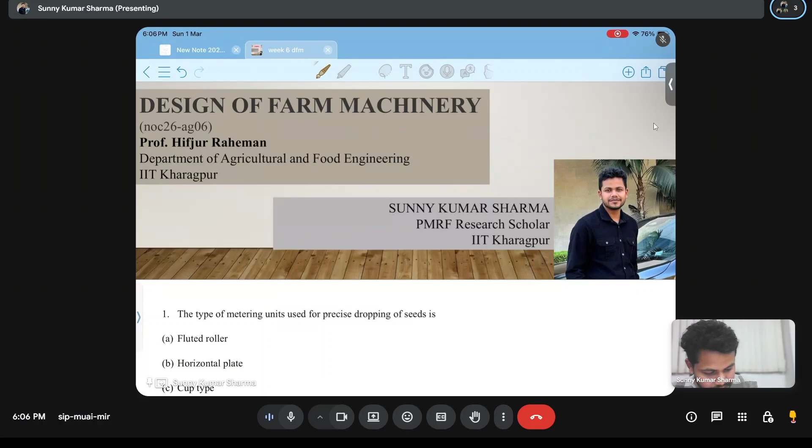So Jigyasa, have you solved all the assignments? Till where have you solved? Sir, actually I didn't know it would be preponed, so I prepared myself for Monday. So I have a lot of doubts from the first week itself. Can I ask now, or after solving this? Yes, you can ask.

Sir, from lecture 5, there was a question on disc plow, not from the assignment question, rather from the lecture video. Week 1? Lecture 5.

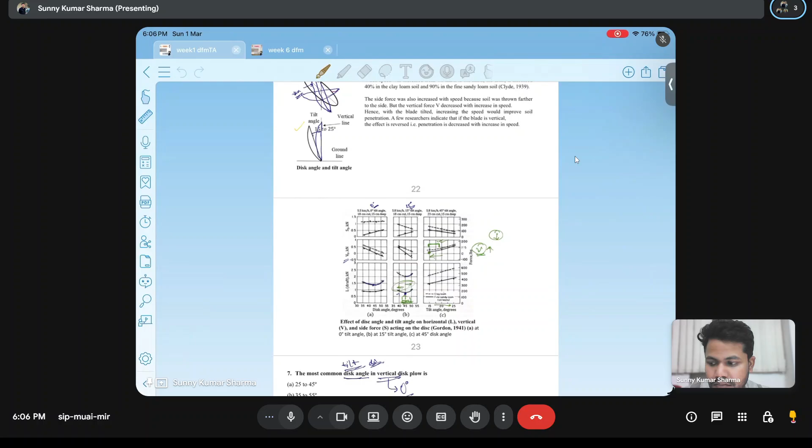There is a question, there is a numerical, sir, solved. Can you please explain that numerical itself, because I couldn't understand the first part. And from the assignment questions, I have doubt from question 5, 7, 9, and 10.

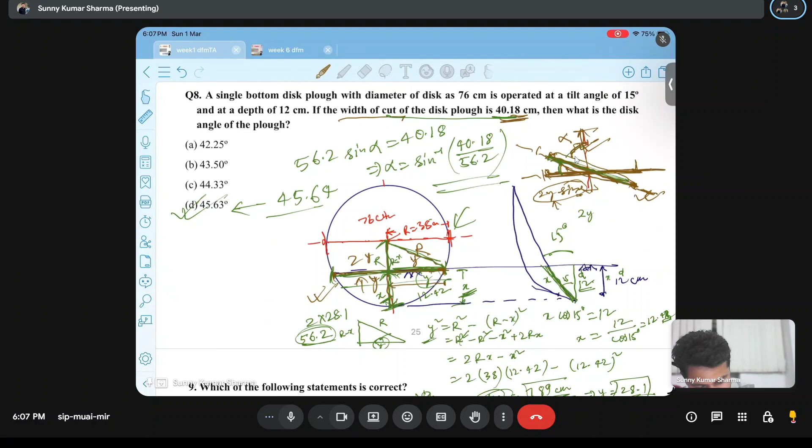Question 5, this one, right? Yes, question 5, then 9, then 7. I am not sure about the options there. I think, sir, this was not in the assignment we got. Those are not the options in question 7. Question 9, question 5 is in the 9, right?

We had, sir, 15 to 55-degree probably. So I'll check the most common disk angle in vertical disk, common disk angle 40 to 45. That is not the answer. So what you are saying is C is the correct answer, no?

No, no, actually sir, the options we have in our assignment are different from this. I was saying that we had different options, and the correct option that was given, that one also I had doubts about. I'll check it.

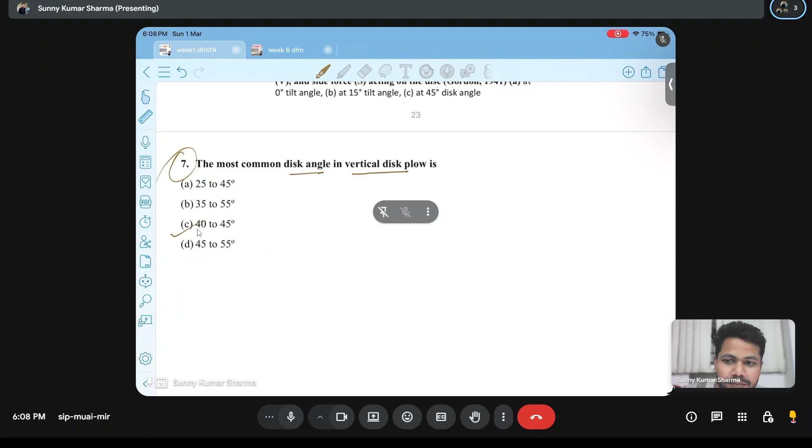Am I pronouncing your name correctly? Chisna, sir, it's Jigyasha. Sorry, Jigyasa, just curiosity.

Okay Jigyasa, actually what you are solving now is this year's assignment, and what we are solving here is last year's assignment. But sir, I had doubt in our assignment, this year's current assignment, given in question number 7.

Here they have asked the most common tilt angle in standard disc plow. And what is the answer? The answer given here is 15 to 55-degree.

15 to 25, and what did you write? No, no, it's 15 to 55. Okay. So I also did 15-degree, but it should be 15 to 25, no sir? This will be 15 to 25, yes.

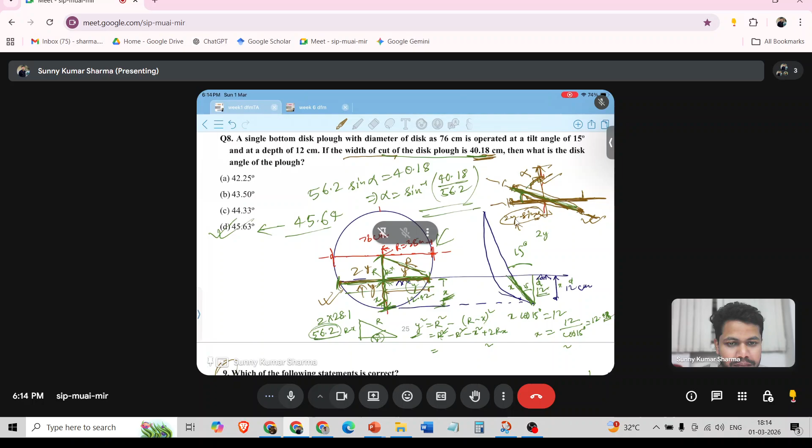And in your assignment, it is written 15 to 55. Sir, yes, that is wrong. Wait, let me check. Actually that's right, I have jotted down all the doubts. Okay, thank you for pointing this out.

You can sum up all your doubts, like this transcript problem you are telling now. Just remind me, I will go to NPTEL. That is a serious issue. If you are missing too much on standardization of the notes, that will be problematic for the coming students as well. Yes, yes.

And what is that exact question of that week one you are telling? Well, that is question number 5. From which week are you telling? Week one. No, no, questions are from lecture one, lecture number 5.

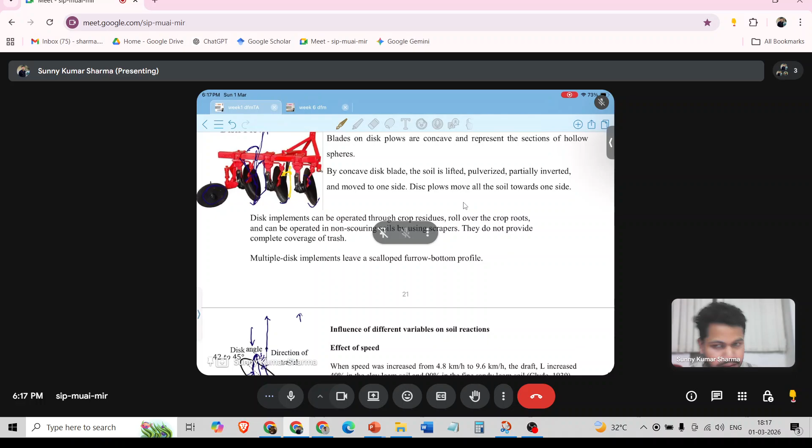Okay, lecture number 5, question 1, like towards 15 minutes. The PDF of the assignment itself, after the date of assignment submission is over, they upload the PDF of the assignment along with the answers. So if with this course it can be provided, that will be helpful to form a note kind of thing, to print out detailed solutions. In other lectures you are being given detailed solutions, and here you are not being given that.

Sorry sir, I couldn't follow. It means in other NPTEL courses you are being given those detailed solutions, solutions also? Is that so? No, it depends, course to course it varies. But after the feedback form and after assignment, there is a section in which they are providing the PDF, may it be a detailed solution or simply a compilation of all the correct options and questions, whatever the course instructor wants. But there is some provision of a PDF. Okay.

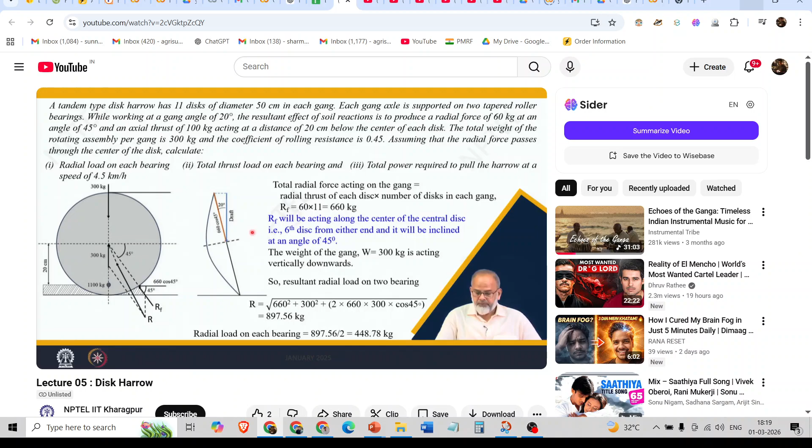Radial load on each bearing, total thrust load on each bearing. Okay miss, I need to read this question, this I have not solved here, by discussing session.

So in next class I will solve this question. Whatever I have taught in question five, right now I will solve this question. Lecture five, I'll ask you in the next class. I will solve that question. Okay sir, I need to read that question, and here we are solving.

Week six, I have noted it down sir, and two more questions from assignment one itself. Okay so sir, question number one. Question one only, assignment one. No, no, not question one sir.

I have to search from here. This is the problem, actually I have to go to the... no I don't have the PDF, so I have to search from here. Sir, the uh...

Question number 9 and 10. They have this: which of the following statements is correct? Nine and ten, they have said like two statements have been given, neither may be correct.

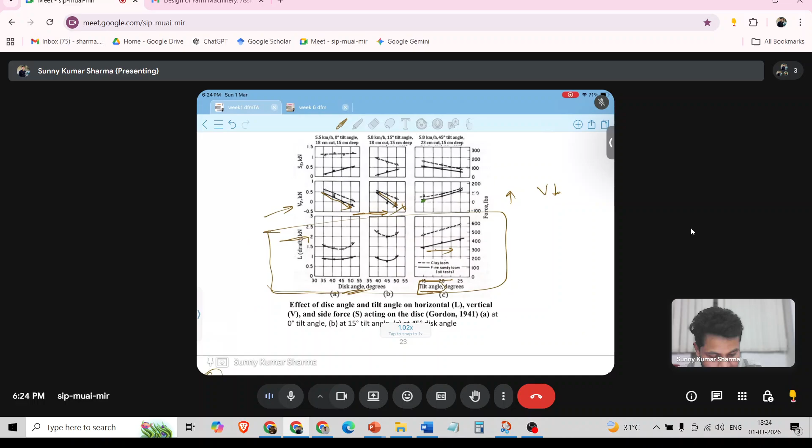Answer question number 10, question ten. What is question ten? It's on disc harrow. The resultant downward force acting on the gang of a disc harrow must act at some distance. Suppose this is the disc harrow.

Here some thrust is acting, this weight - the resultant downward force acting on the gang of a disc harrow must act at some distance from the center to obtain uniform penetration. So this weight will not act at the center, it should act at some distance so that this thrust force, whatever is acting on the disc harrow, will balance the weight moment. So that statement is correct.

Yeah correct, the weight should act at some distance so that this thrust is not acting at the center. If the thrust had acted at the center, then weight would act at the center. If the thrust is acting below, like soil is being disturbed at this portion, so thrust is acting somewhere else, to balance that moment weight acts at some distance. So the first statement in this case is correct.

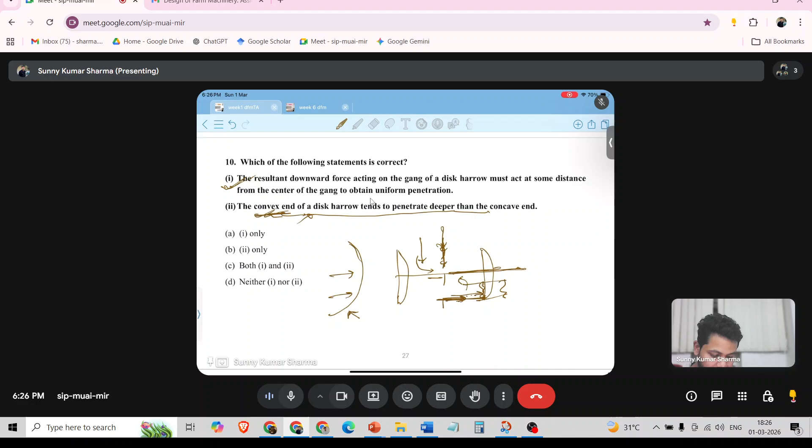The second statement is: the convex end of a disc tends to penetrate deeper. That will become incorrect, because the concave end - this is the concave end and this is the convex end of the disc block - this concave end tends to penetrate. So this will become incorrect, so only one will be correct. That is the only answer, no? Yes, yes, only one is the answer.

Can you please elaborate a bit, explain again? This carries - then in next week, in week two, I have given a detailed elaboration of how these forces act on the disc, where the moment acts. All forces are there - moment force, thrust force, Rn force - all these forces, where they are acting. So this thrust force, this T amount, this thrust is acting

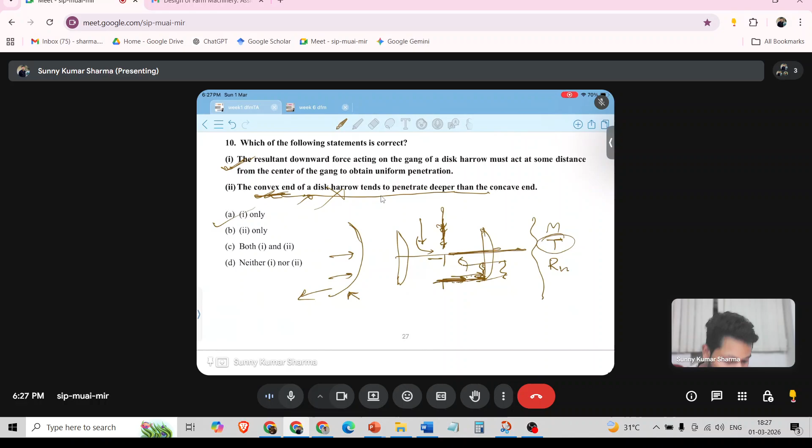at the core part of the disc harrow, at this portion, that green portion, at this part. So this thrust is acting, and it generates a moment on the disc harrow because it is acting downward, so it will try to rotate it, suppose to this side. But we need to counteract this moment.

So what will happen - this weight will act at some distance, not at the center. So it will try to counteract it by rotating in some other direction. That's the statement written: the resultant downward force acting on the gang of a disc harrow must act at some distance from the center to obtain uniform penetration. And if this does not happen, then the penetration will not be uniform. That has been written, okay sir.

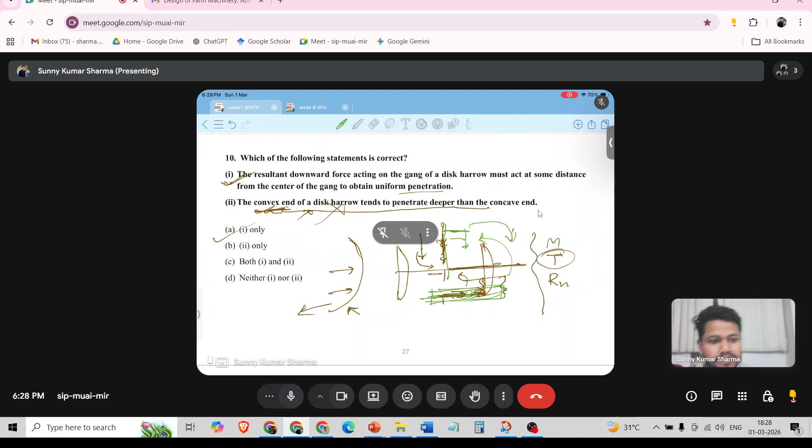That was the next question, that was week five, week question five, no? This one, yes yes.

When px is in the direction of travel - sir, actually in the assignment this figure was not given. Seriously sir, I saw it, I can share the screenshot if possible, but it was not there. Okay sir.

You're sharing. Yes sir, I'm sharing.

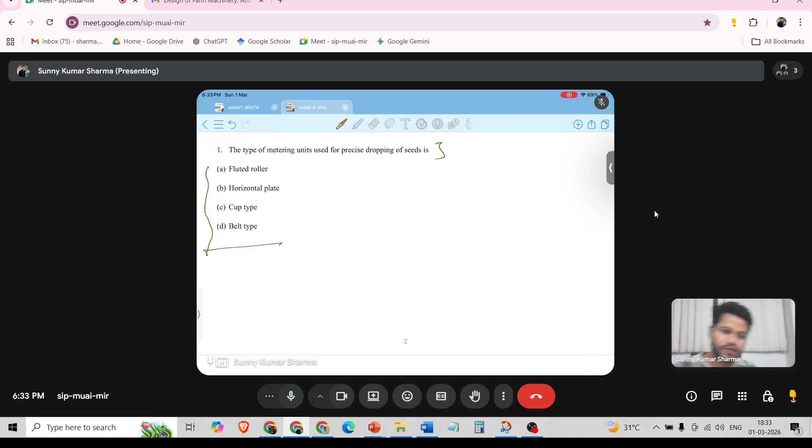Fluted roller is not for precise dropping. Fluted roller is for bulk dropping of seed, and it is also not for maintaining plant to plant distance - it is just for row to row spacing. So fluted roller will not be the correct answer.

Horizontal plate and cup type are also types of planters, but they are also not precise dropping. Horizontal plate, vertical plate are used in planters, but precise dropping of seed is done with belt type metering unit. So belt type will be the correct answer.

Second question: in case of fluted metering unit, the feed rate can be varied with change in...

These lectures you have seen - this is I think lecture 26. Have you gone through that lecture? 31st I think - I have seen the first 10 minutes of 31, so I think that was it.

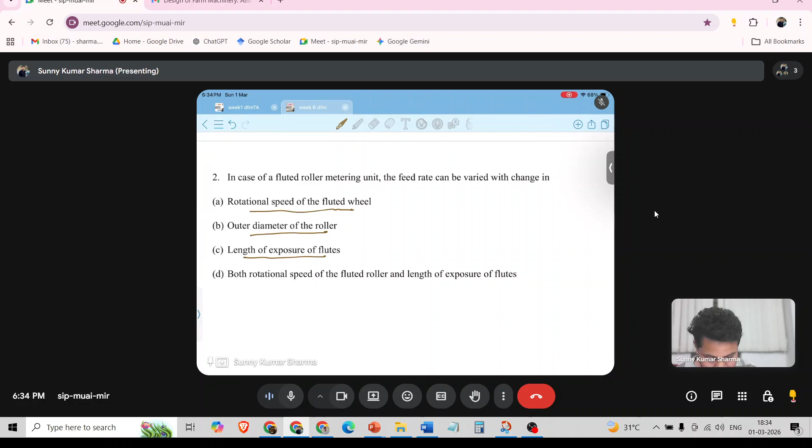Okay. In case of fluted roller metering, the feed rate can be varied with change of rotational speed of the fluted roll, outer diameter of roller, or length of exposure. Rotational speed of the fluted wheel will change the feed rate, and length of exposure will also change it.

Have you seen a fluted roller, how it looks? Suppose I'm making a rough sketch - this will be a fluted roller. Here it will have some flutes, it will be cylindrical, with grooves inside, and seeds will directly come here. When it rotates, seeds coming from the hopper directly come into these flutes. This is called the length of exposure - this length.

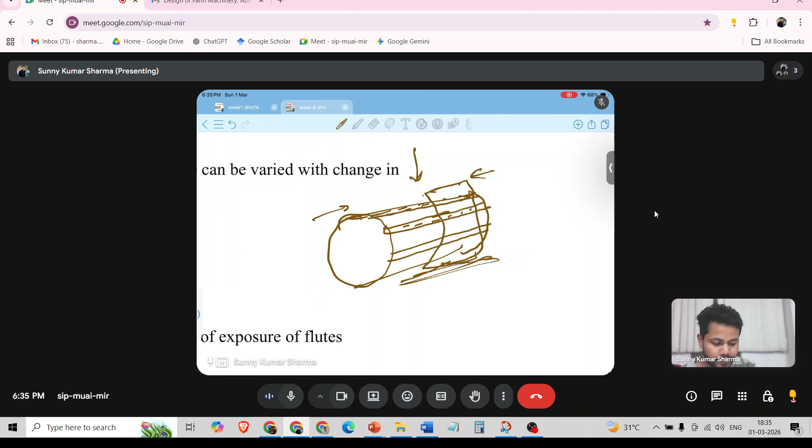Seeds are coming here, and we can manage at what length of exposure we want - this can be slid, and we can adjust the length of exposure. And this rotational speed we can also change to vary the feed rate. So the correct answer will be both rotational speed and length of exposure need to change so that feed rate can be varied. So here the answer will be D.

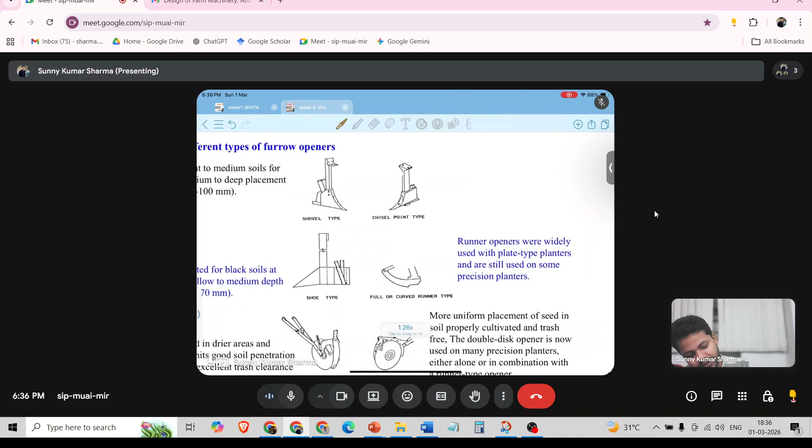So these are some different types of openers - this will also be there in your lectures. Shovel type, chisel type, shoe type, hoe type, single disc, double disc type.

Seed metering has two aspects - first is metering rate, second is calibration. What I just explained is called metering rate, which we can manage. And what is calibration? This you have studied in B.Tech.

What do you mean by calibration of seed drill? With the proper length, like synchronization, we can say.

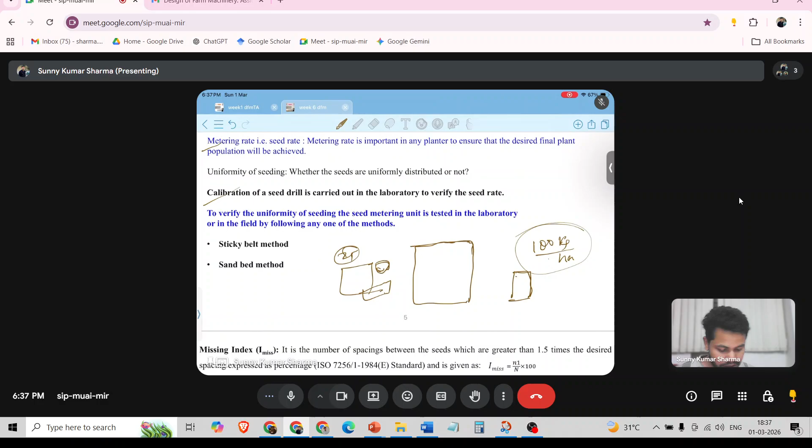Synchronization can be a term like what we do in calibration. We meter that if suppose we need 100 kg per hectare as our seed rate for this field, what we will do at the seed drill is calibrate it. In a fixed revolution, suppose 25 or 30 revolutions, we will check whether we are able to achieve this 100 kg per hectare or not. Accordingly, we will adjust something like the length of the fluted roll, the speed of flow, or other adjustments so that we can achieve this 100 kg per hectare. That is called calibration, to achieve the desired seed rate.

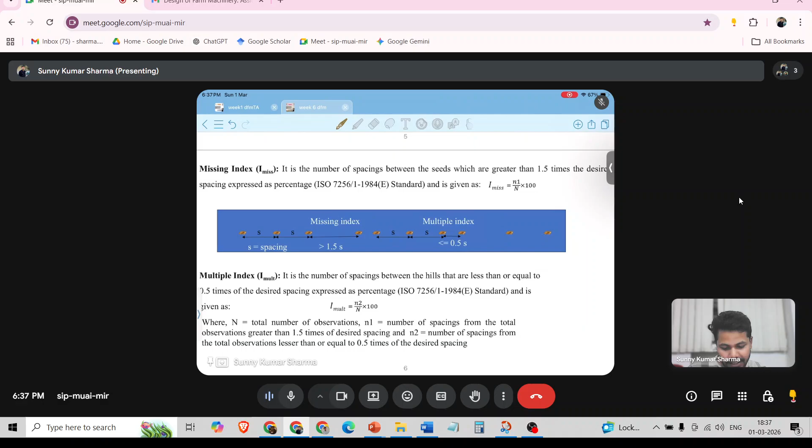Next is missing index, a performance index of the seed drill. Suppose we are dropping seeds in a field at some spacing S. If seeds are being placed at a distance greater than 1.5 times this spacing, that comes under missing index. Multiple index is when seeds are being dropped at a distance less than 0.5 times the spacing. Quality of feed index is between 0.5 times and 1.5 times. These are all theoretical things.

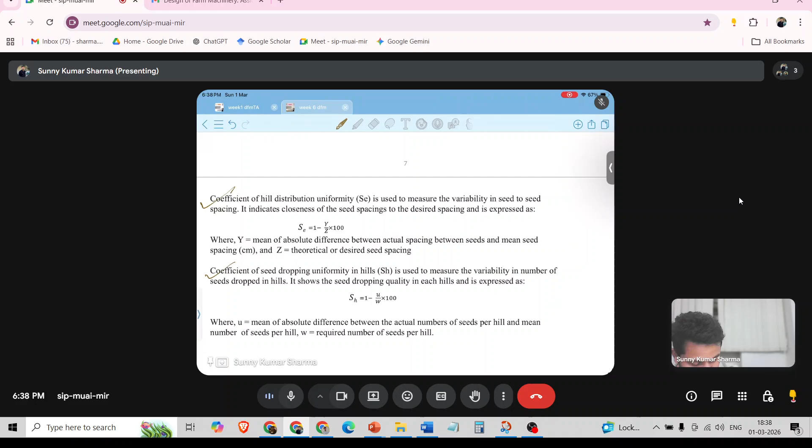Coefficient of hill distribution uniformity and coefficient of seed dropping uniformity are two more terms related to performance of the seed drill. Coefficient of hill distribution uniformity is used to measure the variability of seed to seed spacing, and coefficient of seed dropping is used to measure the variability in the number of seeds dropped per hill. So these are some of the performance parameters.

So with these concepts, questions will come. Suppose the first question of this week is: multiple index of a seed drill is defined as. I've just explained this, so take the answer.

Multiple index is the number of spacings between seeds that are less than or equal to 0.5 times the desired spacing. So option B will be the correct answer.

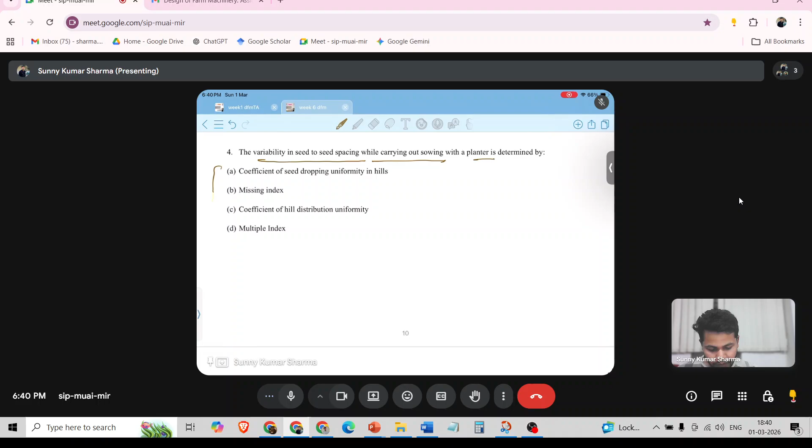Next is: variability of seed to seed spacing while carrying out sowing is determined by factors related to. So what will be the correct answer? Is it missing index? No. It will be coefficient of hill distribution uniformity. That's the answer.

Now the next question. Soya beans are to be planted in rows 75 centimeters apart to achieve a plant population of 4,30,000 per hectare. Assuming an average emergence rate of 85%, the spacing between seeds in centimeters will be?

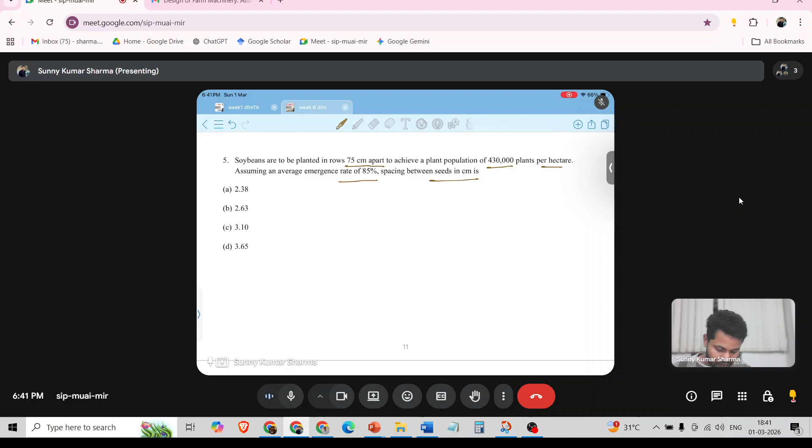So how will we solve this? What is the first step here? Row to row spacing, like the number of rows per hectare, we can calculate. If you see, this type of question is already given as a gate-level scenario.

So whatever next exam question comes related to this farm scenario, this type of question will appear. If you see, these are the plants per hectare and some emergence rate is given, so immediately you find what is the actual plants per hectare. So 4,30,000 plants are there and the emergence rate is 0.85, so we divide by 0.85. That will be the actual amount of seeds we need to plant per hectare. From here you will get, in 10,000 square meters, what is the number of seeds you are getting. So 4,30,000 divided by 0.85, what will it be?

So the answer is... you got the answer, it's 505,882. This will be the number of seeds to be dropped in 1 hectare. So in this 10,000 square meters, this much amount of seed, and 75 centimeters is the distance between row to row. So what concept can we make here, what will be the area which one seed will take?

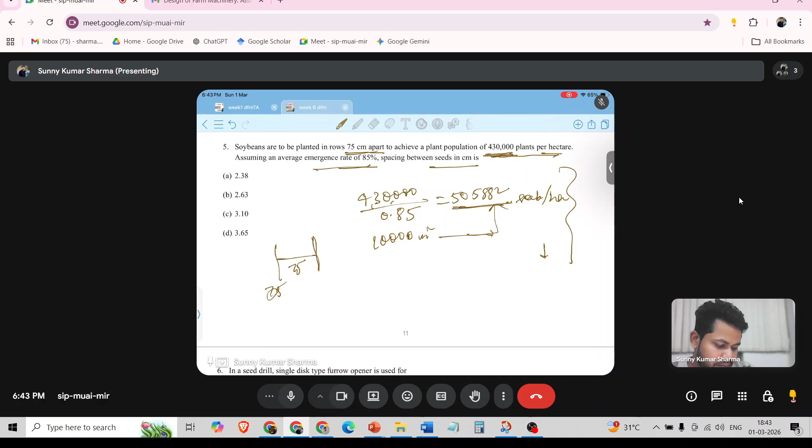Then the spacing can be calculated from that. One seed will take 75 centimeters into the spacing between two plants, suppose S, so 0.75 into S. This is the area one plant is taking, and from here we can get it directly, that one plant is taking this much area. So one seed will take 10,000 divided by 505,882, this much area is being taken by one seed, and this area is nothing but 0.75 into S. So this should be equal, and from this the spacing will come out. That same thing, that is also the same. From there you will get the whole row length, and you divide it by the number of seeds, and from there also you can get the spacing directly.

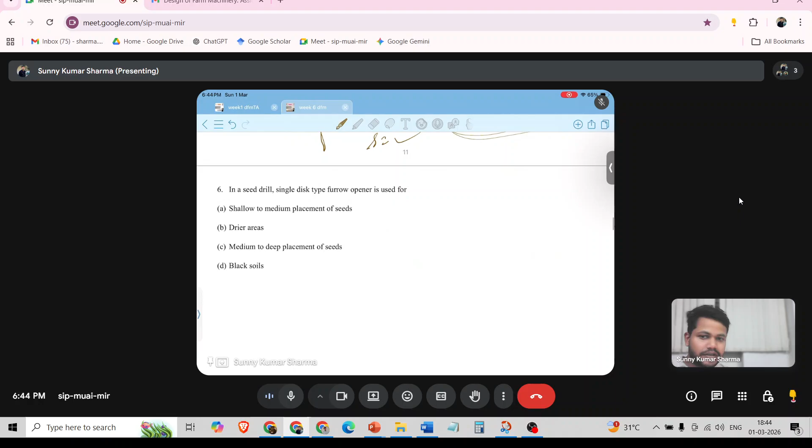The method sir solved this question with in the lecture, we will also discuss here. I've seen that lecture, what sir has done I'll discuss here.

Next question: in a seed drill, single disc type furrow opener is used for. This is a direct question from the assignment lectures, no real concept here, it's just that single disc furrow opener is used for drier areas. I don't know if it's there this year or not, but this next question is there. This one is there in the weak areas, but it's a very complicated problem, so I thought to discuss it here.

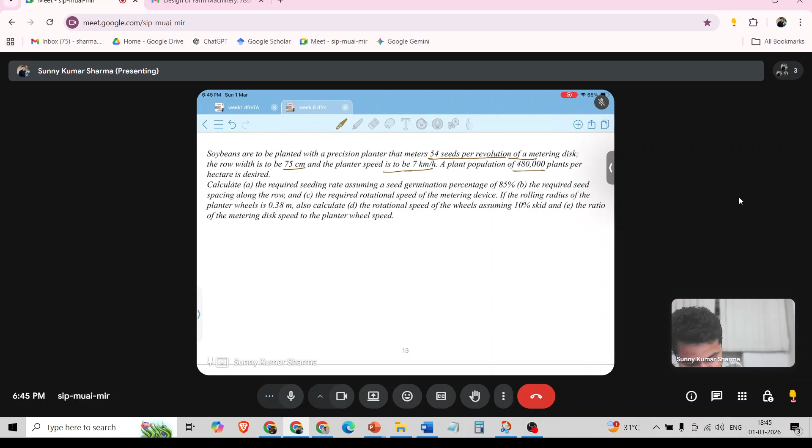Soybeans are to be planted in a precision planter that meters 54 seeds per revolution of a metering disk. The row width is 75 centimeters. Planter speed is 7 kilometers per hour. The plant population is this much per hectare. What is the required seeding rate, assuming a seed germination of 85%?

So the first section is: what is the seeding rate? What is the required seeding rate, if 85% is the germination percentage?

First, for the exact seeding rate, we need to divide this amount of seed by 0.85. That will give the required seeding rate, which should be in plants per hectare.

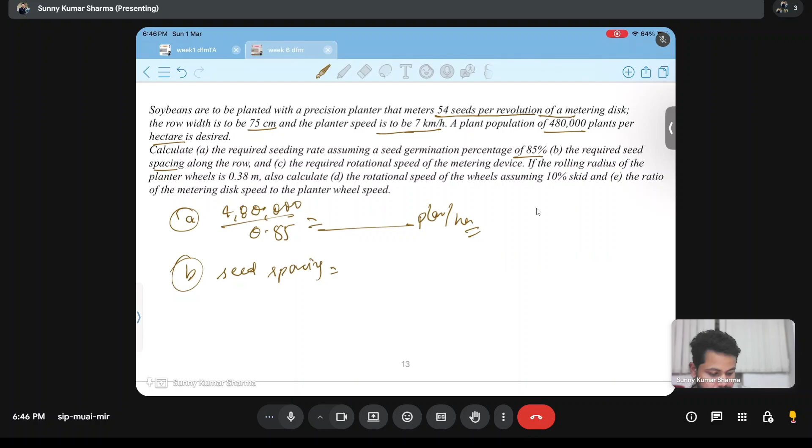First section is the required seeding rate. It comes to 564705.88, which we can take as 564706.

Second section is what is the seed spacing. So what sir has done is find, in 1 minute, what area the seed drill is covering. It is operating at 7 kilometers per hour, and it has a row width of 75 centimeters, meaning 0.75 meter.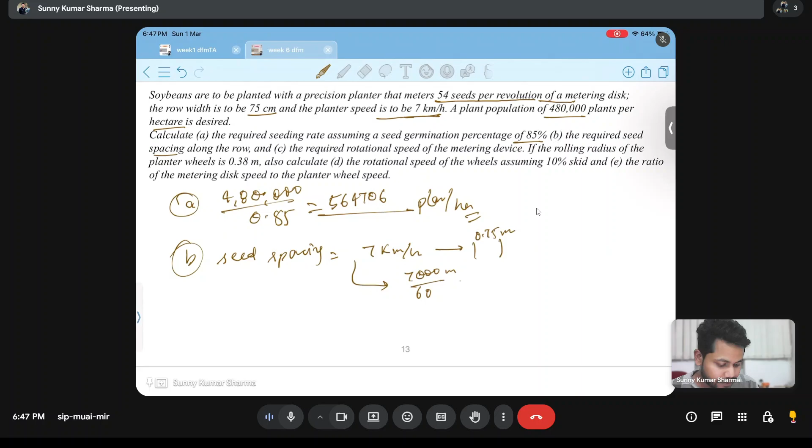So what will be the area covered in 1 minute? 7,000 meters by 60 gives meters per minute, multiplied by 0.75. We'll leave it as 7,000 into 0.75 by 60, this will be meter square per minute, which comes to 87.5 meter square per minute.

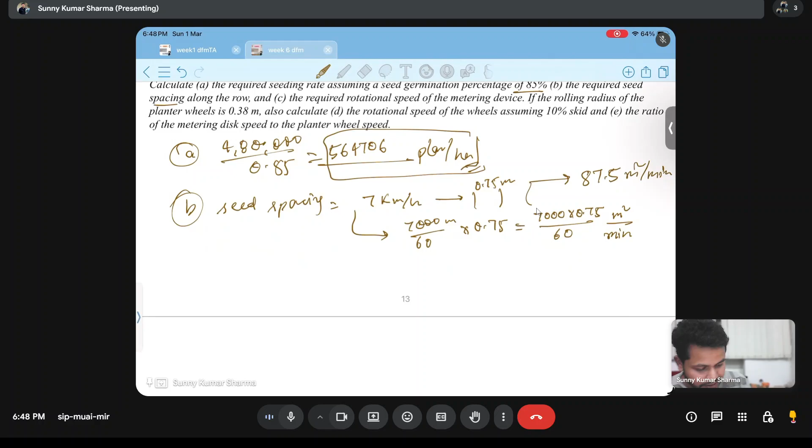And this much plants per hectare means 564706 seeds in 10,000 meter square. So in 1 meter square, this much amount of seed is there, which is 56.47. So what will be the amount of seed in 87.5 meter square?

87.5 multiplied gives 4941. So what is happening here is 564706 by 10,000 into 7,000 into 0.75 by 60. You'll understand that line of thinking. So this is the number of seeds per minute.

Now see how much length the seed drill is covering in 1 minute. It is operating at 7 kilometers per hour, so in 1 hour it covers a length of 7,000 meters. 7,000 meters by 60 is meters per minute, which is 116.66 meters per minute.

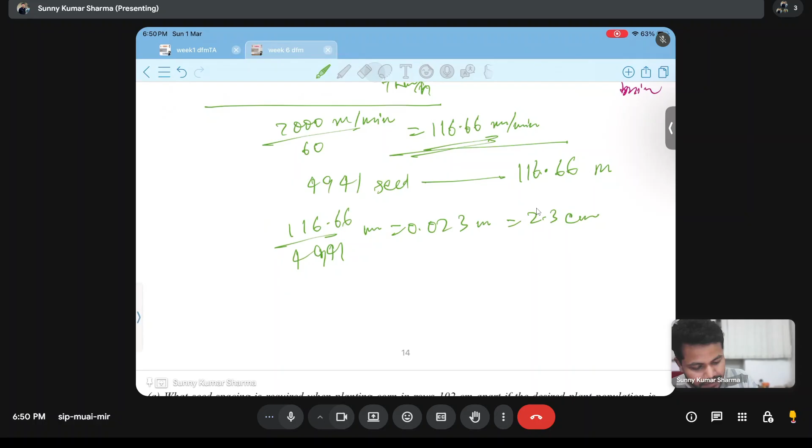Now why did I do that part? You see, this divided by this number of seeds: 7,000 by 60, divided by 564706 by 10,000 into 7,000 into 0.75 by 60. Can you see something? This part and this part will cancel out, and this is the emergence rate. And 0.75 is the spacing between two rows, the row width. So what's happening here, you can do the same thing directly.

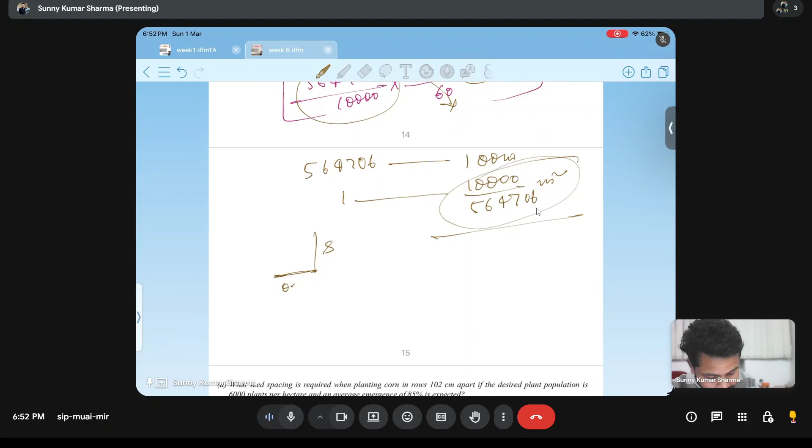So what I'm trying to say is: 564706 seeds in 10,000 meter square, so one seed in 10,000 by 564706 meter square. This area is divided by the area which one plant is taking. Suppose one plant takes the spacing into row width, that is 0.75, meaning this will be divided by 0.75. We can get the spacing directly. This is the same thing which I explained in the previous question.

This is the thing I've written at the end. Let me explain again what I've written in brown pen now. So this is the row width, 0.75 meter or 75 centimeter. We don't have to do the complete calculation, rather we can use this shortcut.

From here, one conclusion we can also draw: one plant is taking 0.75 into S meter, or K meter, or anything. That spacing into row width is being taken by one seed, so one seed is taking this area.

And what is the total area taken by one seed? From this, we know that this much seed is taking 10,000 meters square. So one seed is taking 10,000 by 564706 meters square.

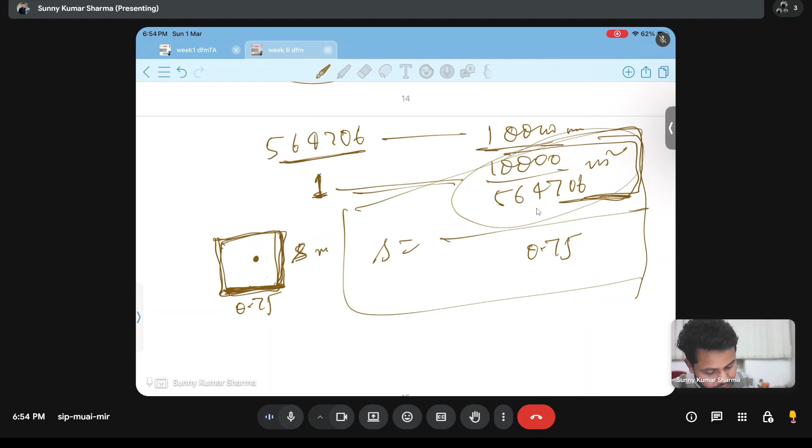This area is nothing but that same area. So 0.75 into S is nothing but that area, 10,000 by 564706. So spacing, what will be the spacing? 10,000 by this and by 0.75. So directly this is coming here. 10,000 will go up. 10,000 by 564706 by 0.75.

So we don't need to set it out like this, and this whole thing can be confusing. Are you getting it? Yes sir, you have to. Actually it is a bit confusing. If you see it this way, you can see what is going on.

So what we can conclude here is that there is no effect of speed. What we studied in theory also, speed has no effect on seed rate or seed spacing. So whatever will be the speed of seed drill, 7 km per hour, that is being cancelled out. That is not affecting the seed spacing. Whatever speed we are operating the seed drill, this will be the spacing maintained. With that concept also, we don't need to include this speed thing that you have seen.

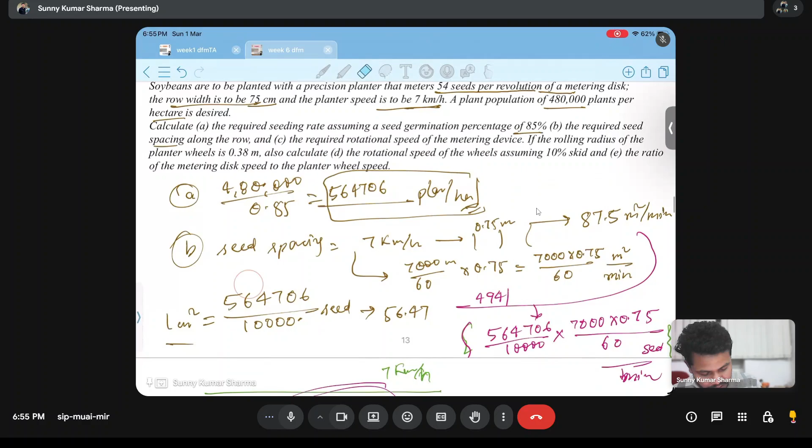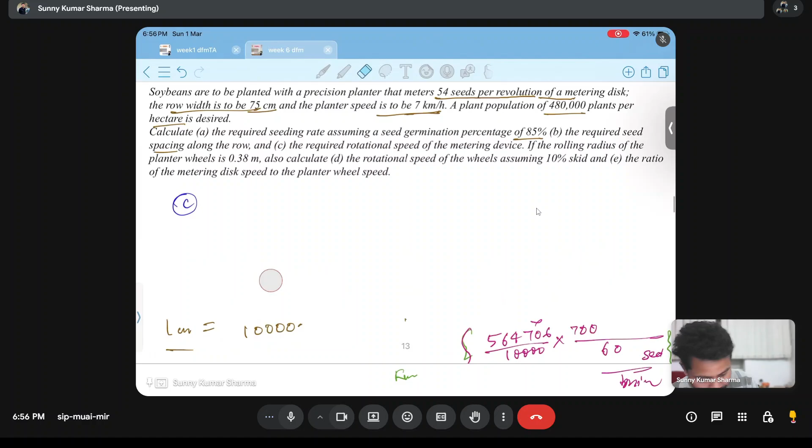So seed spacing we have discussed in detail. The third question is the third section: the required rotational speed of the metering device, RPM of metering device. We have an idea of how we can obtain this rotational speed.

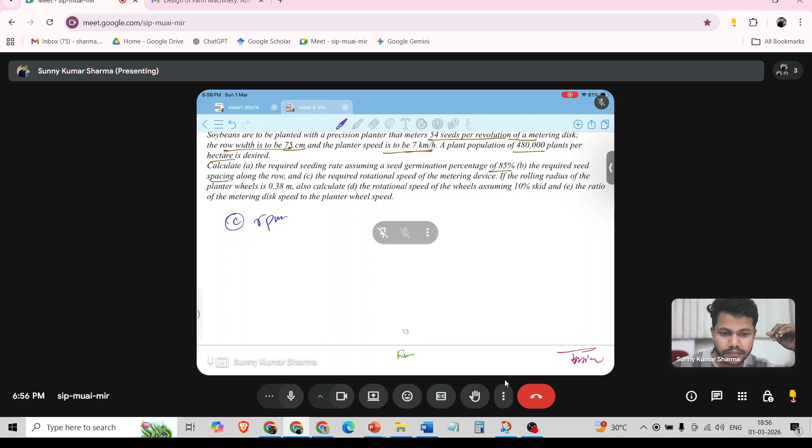Rotational speed of the metering device. This is the metering device. What do we know about the metering device? This implies that the meter gives 54 seeds per revolution. In one revolution, it is dropping 54 seeds.

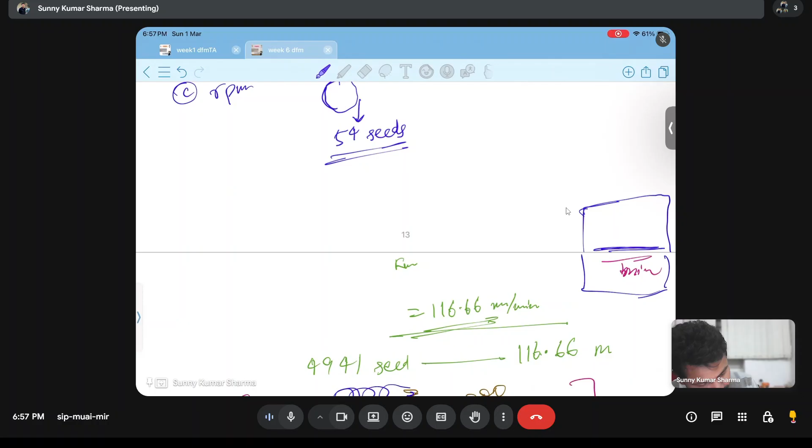But we know another thing: how many seeds are being dropped in 1 minute, which we have calculated. We wrote here, and at this part we were discussing how many seeds were being dropped in 1 minute. 4941 seeds were being dropped in 1 minute, that we were calculating. So 4941 seeds are being dropped per minute.

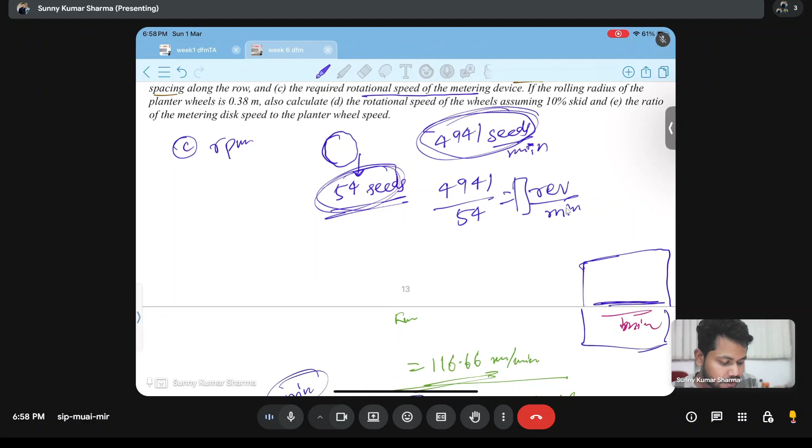And 54 seeds in one revolution. So what will be the revolution in 1 minute? This amount of seed divided by 54 will give the number of revolutions. Understood? This is the total number of seeds, and in one revolution there are 54 seeds. So total revolution is 4941 by 54, which will be the total number of revolutions. This will be the total number of revolutions, and we are doing this per minute, so this will directly give you the RPM or rotational speed of the metering device. Clear? Yes sir. Okay, so this is the rotational speed, RPM of metering device.

And next thing is rotational speed of the wheel, assuming 10% skid. What happens in skid is that our vehicle will cover more than the theoretical distance, meaning its actual velocity will be more than the theoretical velocity. So 10% skid means actual velocity is 1.1 times, 10% more than the theoretical speed. It means this.

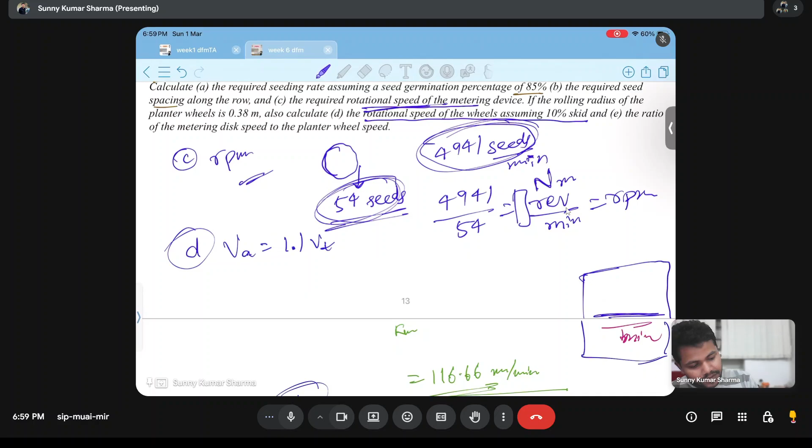So what is the theoretical speed? 7 km per hour is given. So 1.1 into 7 km per hour, this will be the actual velocity. So the rotational speed of the wheel, what they're asking, given the rolling radius of the planter is 0.38 meter, calculate the rotational speed of the wheel. So this section is to find the rotational speed of the wheel when the rolling radius of the wheel is 0.38 meter.

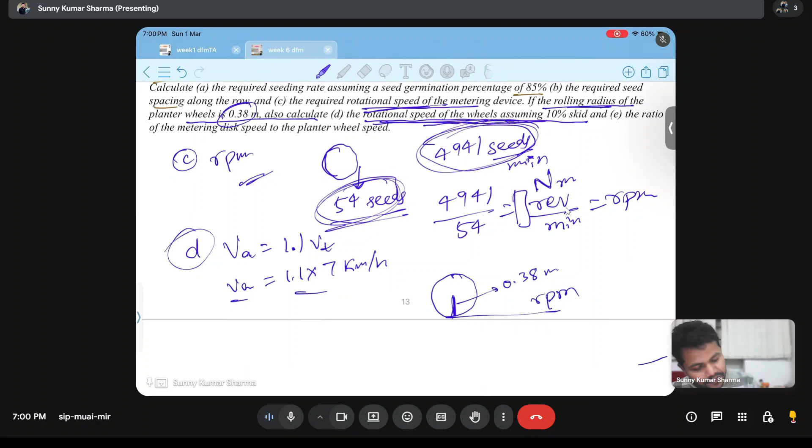Rolling radius of the wheel is 0.38 meter, this radius is 0.38 meter, and its actual velocity is also given. What will be the rotational speed, meaning what will be the RPM of the wheel? It can directly be calculated from 2 pi r n. This will become the actual velocity.

So 2 pi into 0.38 into n, will give you, if you are taking it as rotation per minute, you need to convert this into meter per minute. So 1.1 into 7,000 meter by 60 meter per minute. So here you can get rotation per minute of the wheel. Understood?

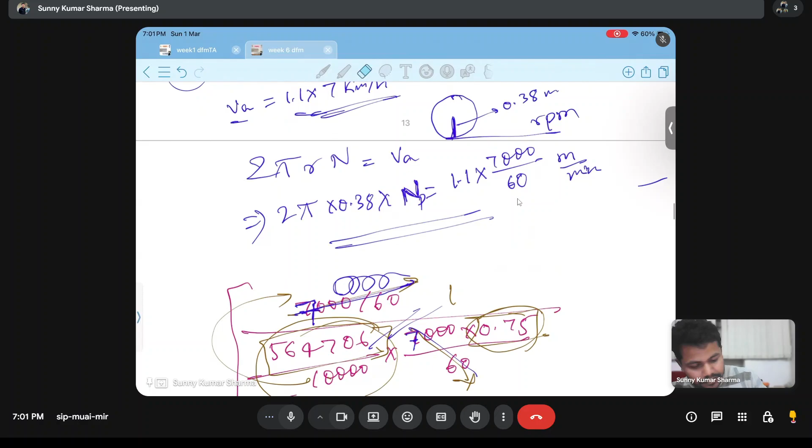So this will be the rotational speed of the planter, Np. Next section is the ratio of metering disk speed to planter wheel speed. Metering disk speed is denoted Nm, and planter wheel speed is NP. So the next question is the ratio of Nm by Np. That ratio you need to find out.

Next question, here we will solve numericals this week. Next week I will design one seed drill and cover all your doubts also.

So the next question is: what seed spacing is required when planting corn in rows 102 centimeter apart if the desired plant population is 6,000 plants per hectare at an average emergence of 85%.

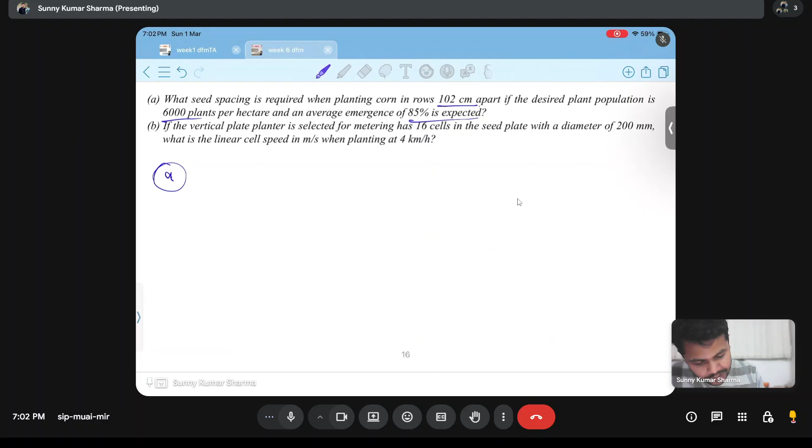So directly we can do what we have just seen: 10,000 by 6,000 plants, 6,000 by 0.85, into the row spacing 1.02 meter. This will directly give you the spacing in meters. So part A is done.

1.38 meters. And you can also go from the 4 km per hour side. You will calculate what meter square per minute is, then what the seeds in a minute are. In 1 minute, what length is it taking? At this length, how many seeds are being dropped? You divide that length by number of seeds, and you will get the spacing. When you see the lecture, you will understand this thing going on there.

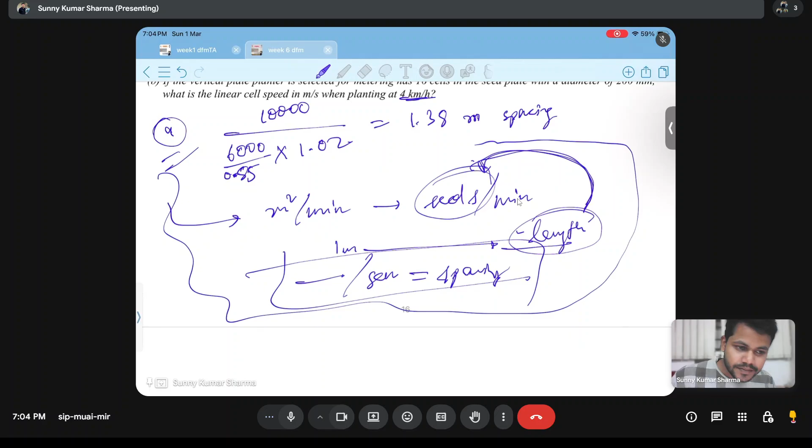Whatever I've shown, for the second bit we can just do the unit balance. The second question we can do simply by first balancing the units for the 1.38. Yes, 1.38 is the answer.

So the second part is: if the vertical plate planter is selected for metering, it has 16 cells in the seed plate, 16 lobe cells, with a diameter of 200 mm. So how many seeds will it drop? 16 seeds will be dropped in one revolution by this planter plate. And its diameter is 200 mm.

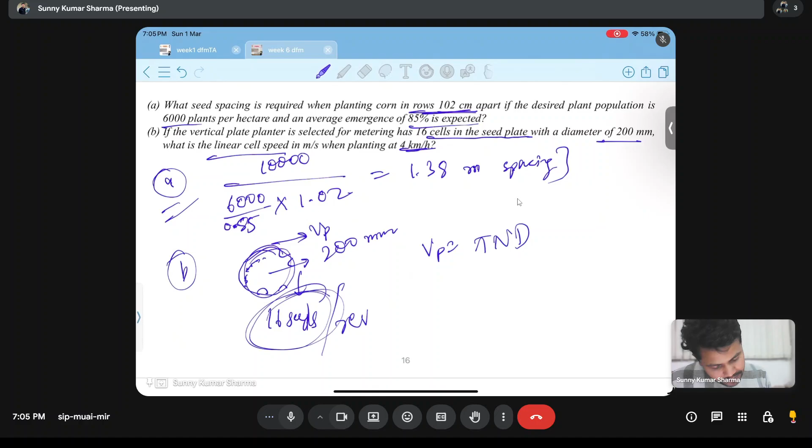What is the linear cell speed? We need to find the speed of the plate. Linear speed equals pi N D. So we need to find the diameter given: 200 mm means 0.2 meter. We are going in meters, so if you want meter per second or meter per minute, you can do that. If N is RPM, then velocity will come in meter per minute. So the main thing we need to find is the RPM. What will be the RPM of this planter?

Number of revolutions per minute, how will you calculate it? Earlier we found it, no, that was a different question. Same procedure you need to follow: 16 seeds in one revolution. So you need to find what this planter is, how many seeds are being dropped in one pass here. So 4 km per hour is the speed of the planter.

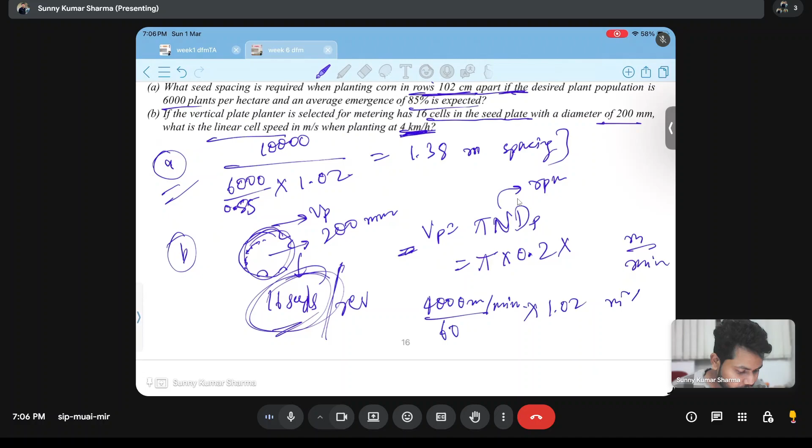So 4,000 meter by 60, this is the meter per minute. And it is covering a row length of 102 centimeter, means 1.02. So this is meter square per minute. And how many seeds per minute? This much area, this much area in 1 minute, and how many seeds are being dropped in this area?

So in 10,000 meters square, how many seeds are there? 6,000 by 0.85, 6,000 by 0.85, the answer is 6,000 by 0.85, which is 7059. 7059 seeds in 10,000 meters square.

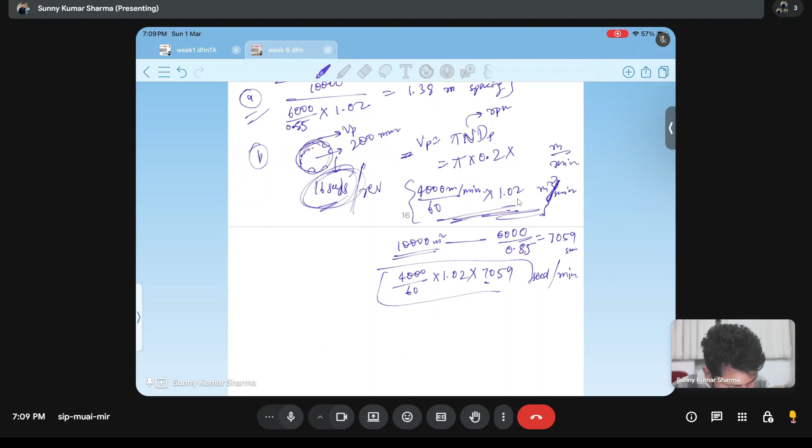It is... yes sir, 48. So 48 seeds in 1 minute and 16 seeds in one revolution. 16 it is coming, 16 seeds it is dropping in one revolution. So for 48 seeds, how many revolutions is it doing? Simple, it is 48 by 16. This much revolution it is doing, and what we are discussing is in respect of 1 minute. So this revolution is taking place in 1 minute. So what will be the RPM? RPM of the planter plate will be 48 by 16.

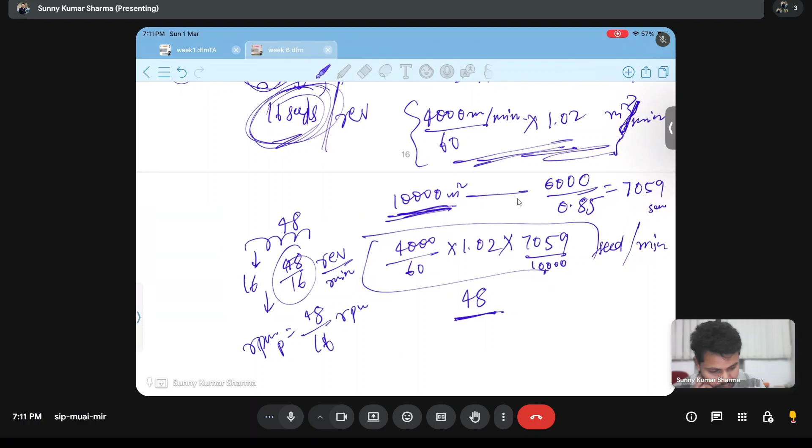So 3 RPM. So pi into 0.2 into 3, this will directly give you the velocity of the planter plate.

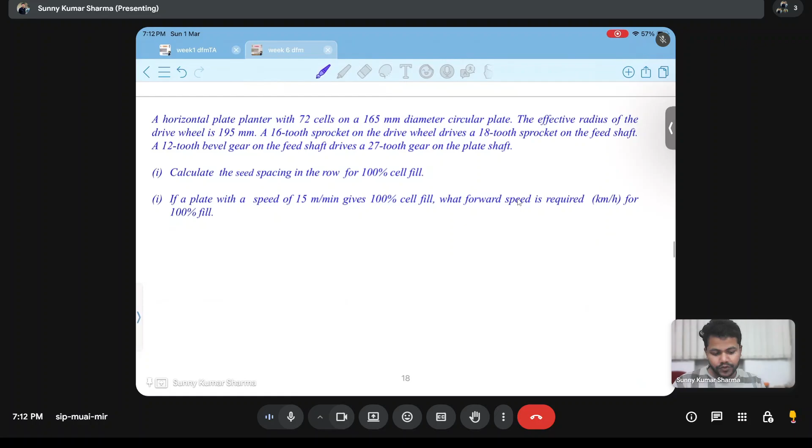So if you have understood this, 2-3 questions, all seed drill questions you can solve. One more concept is there, we will also discuss here. Then everything will become clear for seed drill.

Suppose a horizontal plate planter with 72 cells on a 165 diameter circular plate. The effective radius of the drive wheel is 195 mm. 16 tooth sprocket on drive wheel.

So what is it telling? It has a planter plate. It has 72 cells on a 165 diameter circular plate. And what is the diameter of this plate? 165 mm. The effective radius of drive wheel.

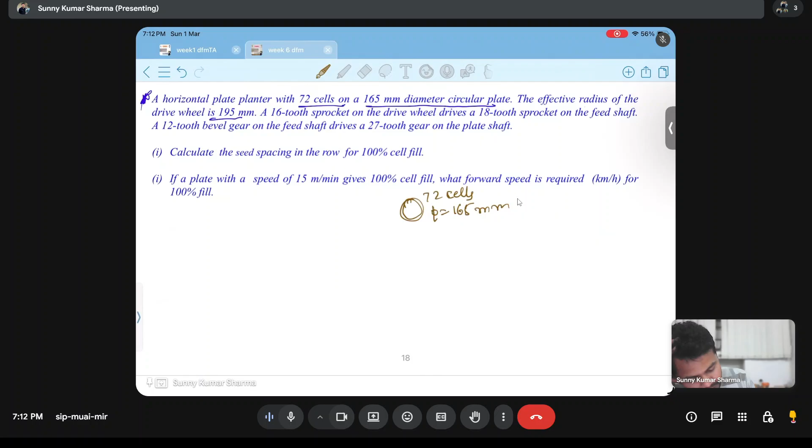Suppose here the drive wheel is there. This drive wheel has effective radius equal to 195 mm. 16 tooth sprocket on drive wheel. This drive wheel has 16 tooth sprocket.

It drives an 18 teeth sprocket on the feed shaft. It is driving an 18 teeth sprocket on the feed shaft.

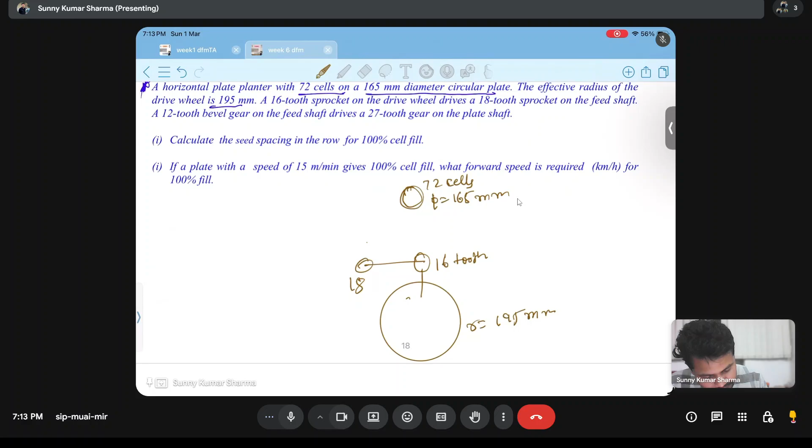And a 12 teeth bevel gear on feed shaft. This has again 12 teeth and it is driving a 27 tooth gear on plate shaft. This is plate shaft, here the plate is there. On this, the 12 teeth bevel gear is driving the 27 tooth plate shaft. This is the whole pattern of the planter.

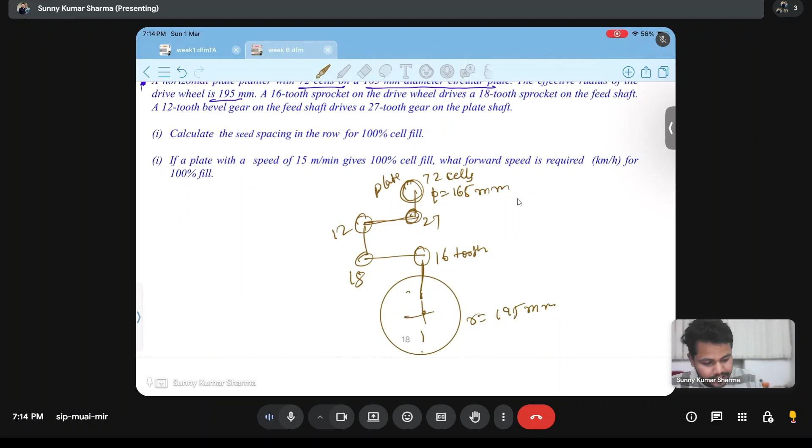So if you understand this question, I think this whole section will be revolving around these 4-5 questions. So we have to first find the seed spacing. So we will find seed spacing.

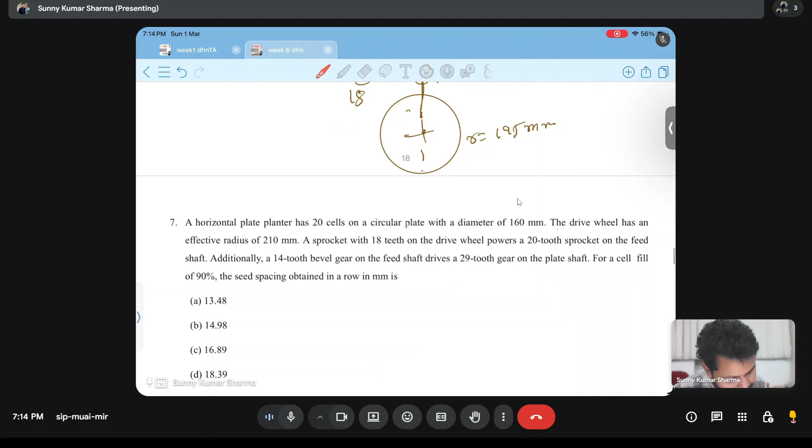The drive wheel has an effective radius of 210. An 18 teeth sprocket on drive wheel powers a 20 teeth sprocket on feed shaft. Additionally, a 14 teeth gear on feeds shaft drives a 29 teeth gear on plate shaft. For a cell fill of 90%, what is the seed spacing?

So this type of question comes, you can directly relate. Suppose this planter has a speed NP and NG, where NP is plate side speed and NG is ground wheel side speed. So first thing you need to find out is the speed ratio of this gear train, NP by NG.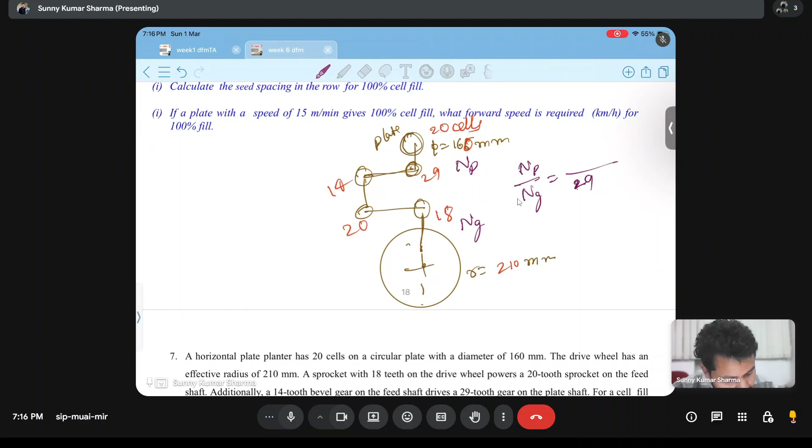For that, you have studied in detail that NP by NG ratio will be on opposite side. So plate side, if it has 29 teeth, it will come in the denominator, and alternate teeth you arrange in the numerator. So here it will come 14 into 18 over 29 into 20. This will be the NP by NG ratio, giving 14 into 18 divided by 29 into 20.

It is coming to 0.43. So 0.43 by 1 means that if the ground wheel rotates 1 revolution, the planter seed plate rotates 0.43 times. One revolution of ground wheel gives 0.43 revolution of that seed plate. This is the first thing you need to find out.

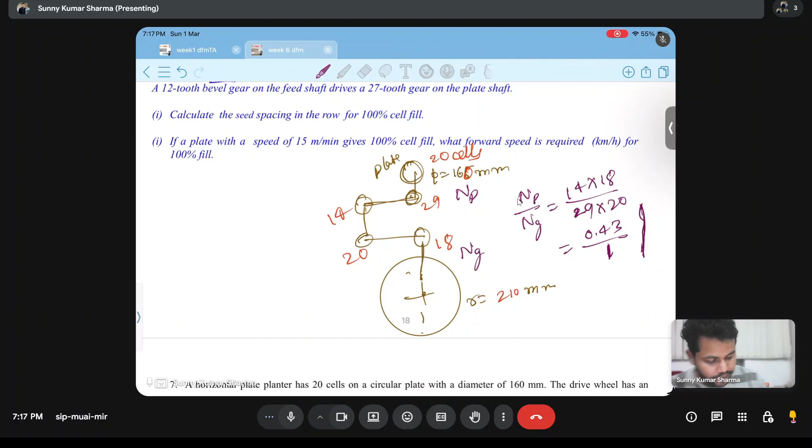Now we proceed. This ground wheel has a radius of 210 mm. So what will be the circumference of this ground wheel? 2 pi r, so 2 pi into 0.21 meters.

This is the distance covered by the seed drill, the distance covered by the ground wheel. And when it is covering this distance, how many revolutions does that seed planter make? 0.43 revolution. And in one revolution it has 20 cells, meaning 20 seeds will be dropped.

So, 20 cells into 0.43 revolution into the cell fill. Say it has 90%, meaning 100% of 20 cells seeds are not coming, only 90% is coming. So this amount of seeds is being dropped in this much distance. If you divide this distance by this number of seeds, you will directly get the answer.

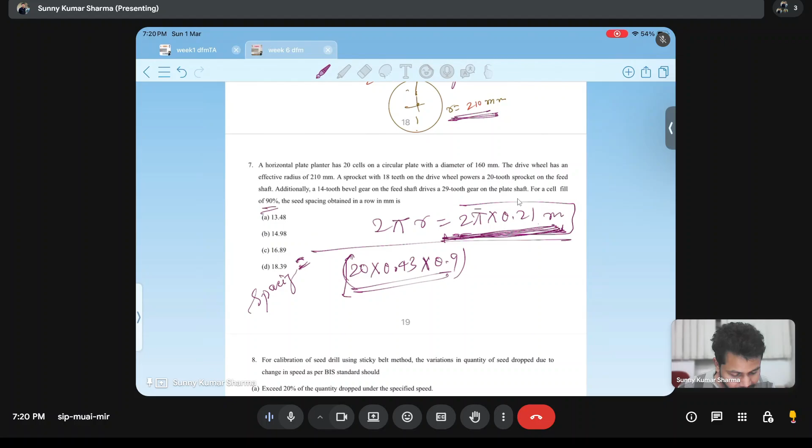Okay, if you understood this concept, then all the seed spacing questions you can solve. So how did we find the spacing? We can solve this: 2 pi into 0.21 divided by 20 into 0.43 into 0.9. Divide this thing.

17.04 is coming, and it is near to 16.8. So we have taken something like a decimal value. 16.89 will be the correct answer for this question.

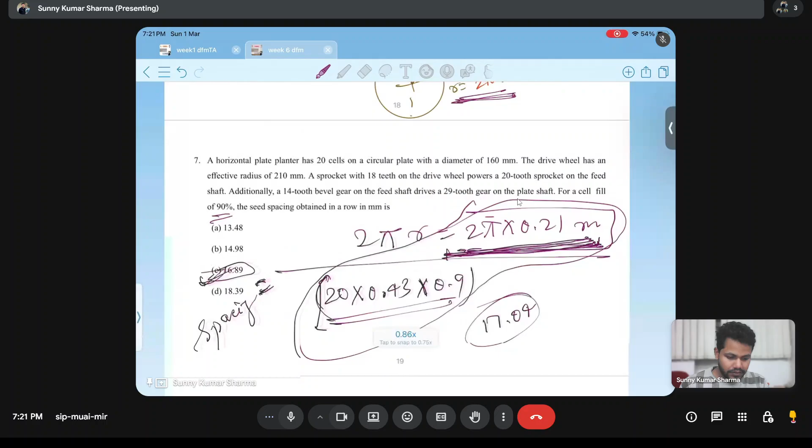Did you understand this question? You solved it by yourself. Yes, you solved it by yourself.

Next question: as per BIS for calibration of seed drill using sticky belt method, the variation in quantity of seed dropped due to change in speed as per BIS standards. This is a theoretical thing you need to remember. The answer is it should not exceed 15% of the quantity dropped under a specific speed.

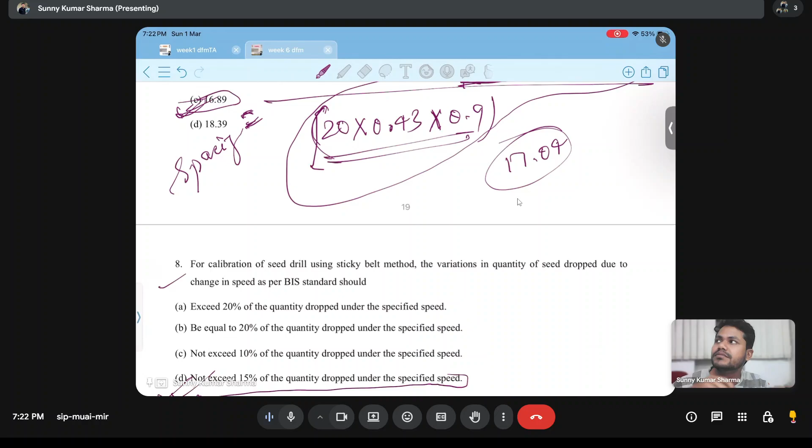How will the final examination questions be, sir? Will they be around the ones we are solving here, the assignments, or from the lectures? It is a mixture of all those things. Direct numerical questions, but priority should be given to assignment questions, as most assignment questions will be there. Maybe 40 to 60% direct questions may come from assignment, and direct PPT or lecture questions, maybe 10 to 20%. Assessment based new questions, maybe a whole new question, will be around 20%, but that will also be based on the numericals we solve in lectures.

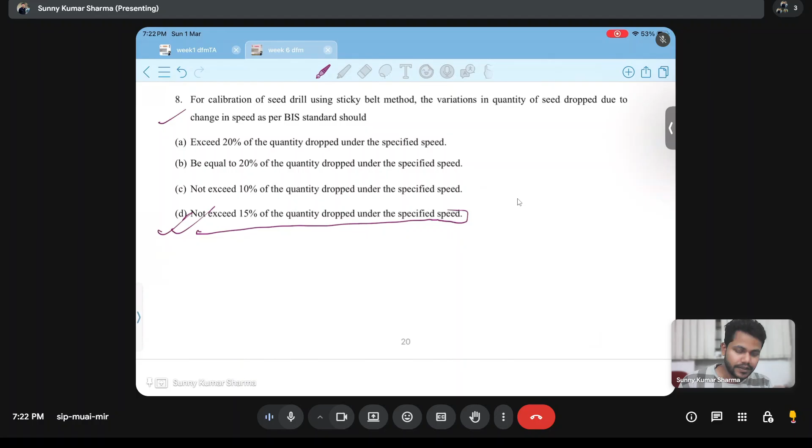What will be the percentage of numerical versus theoretical, fact-based questions? I think 40% is numericals, 60% is this kind of question practice. Okay.

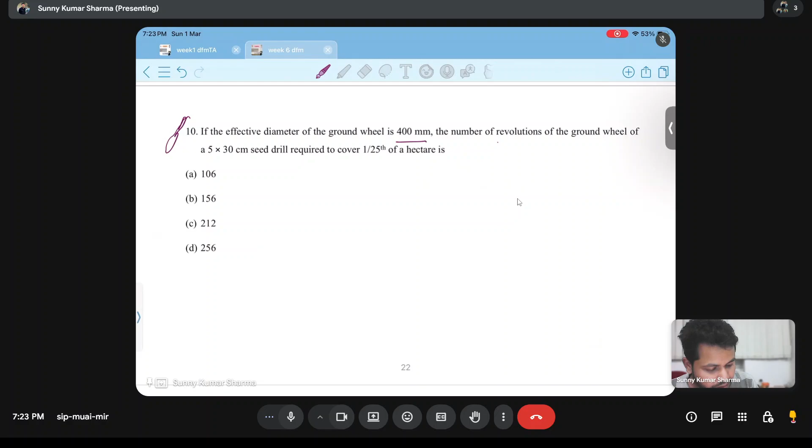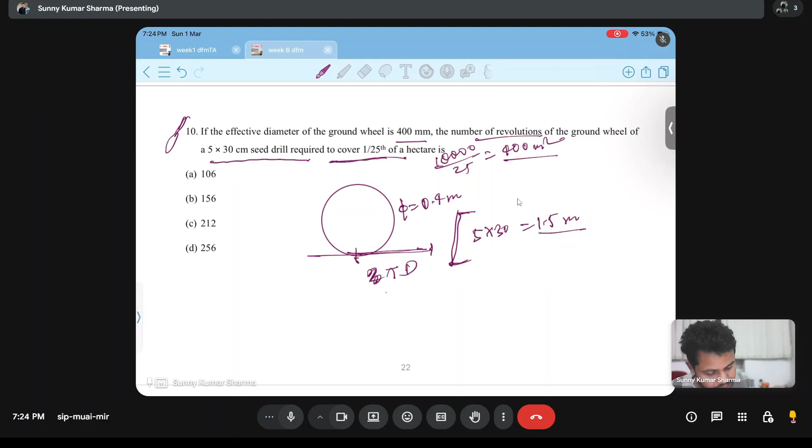So for 400 meters square, what will be the number of revolutions? What is the area covered in one revolution? 1.5 meter into the distance covered in one revolution. Distance in one revolution is pi times diameter, which is 0.4 times pi. This is the distance covered in one revolution, into 1.5 meter width, giving the area covered in one revolution. We need to travel 400 meters square total, so 400 divided by 0.4 into 1.5 into pi will be the answer.

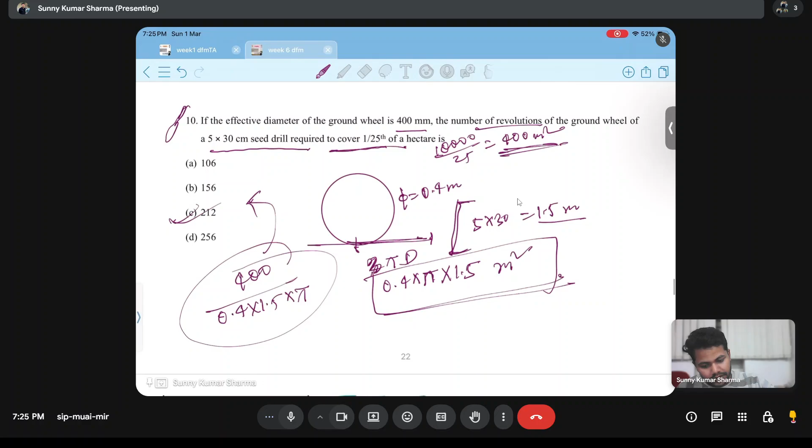The answer is coming. So this is how all numericals are in seed drill. In the next lecture we will see how to design a seed drill, along with how to design a seed metering mechanism, so all your seed concepts will become clear.

If you have any doubt... Seed drill design, which topic are we doing next class? Seed metering mechanism design also. Seed drill design means the hopper and furrow opener, along with power requirement, exposed length, volume handled - all that we will discuss.

That will be in the next to next Monday, not this Monday, the 9th.